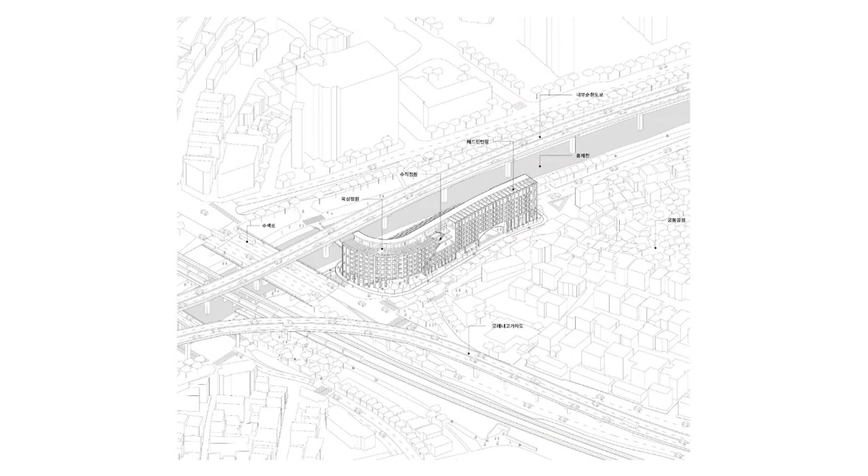Noise. So basically what we did was - the other side happened to be south-facing - we put all the rooms on the south, so you get this sort of almost chicken coop, but in a nice, curvy, 147 meter long linear volume.

Where it faces the ring road is almost like an atrium-like condition, where things are stacked up on top, so that you get the noise but also get the good view. The dashed line you see in the middle is the elevated road.

These are the machines, and on top is actually a vertical garden. This usually has an installed 60% site coverage ratio, but this is special zoning, so we're doing almost more than 80.

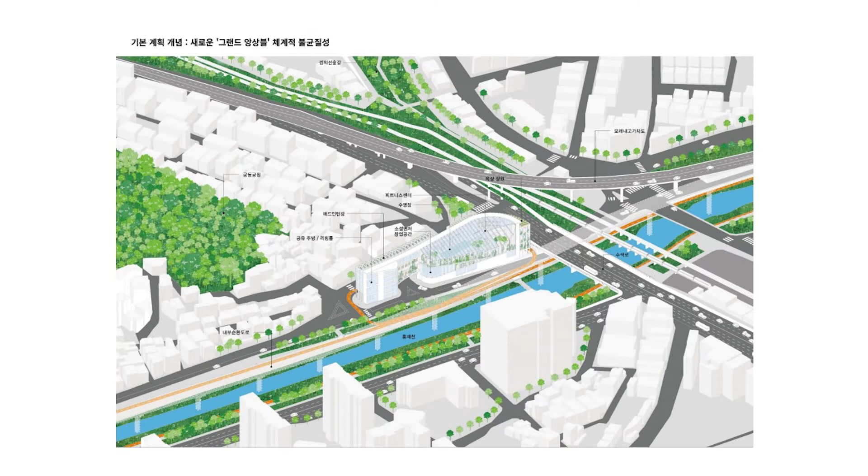So there's hardly any ground left, so everything is built on top. This is a section of the rainwater pump station, which is about almost 30 meters high, vertical for water and so on.

And then we're building gardens and atriums facing it, and also swimming pools and so on. We are working with very good activist type people. Actually, that was part of the brief, that we try to bring this sort of ecology, and actually we were able to suggest that.

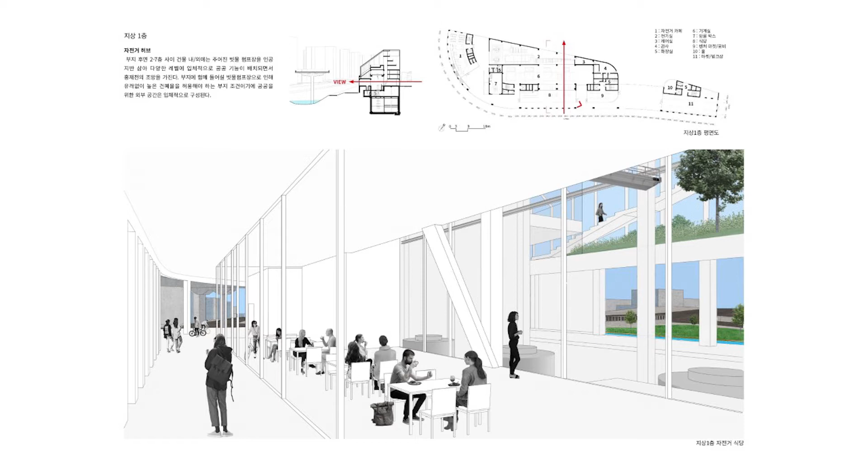So we try to push it as a kind of Silicon Valley of cooking and chefs, because this area has little nice restaurants popping up. So ground level will have the pump. This machine, this industrial site, will be a kind of view-through, so it's part of the identity of this.

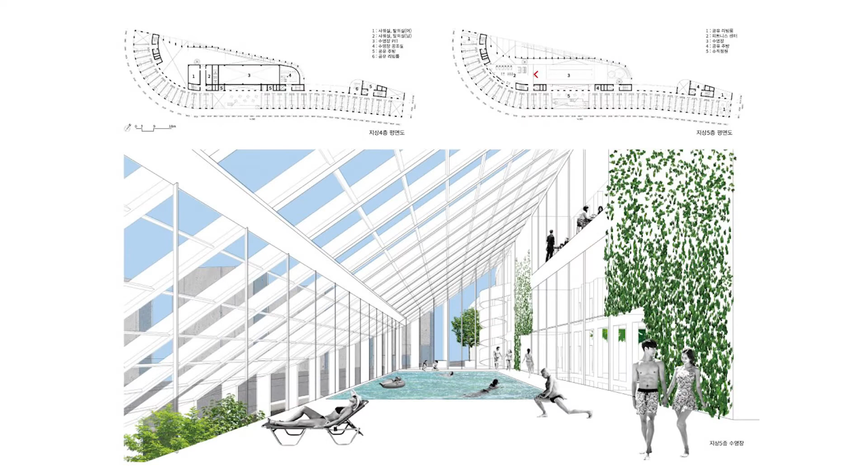And then on top, some gardens, because we have to have that, otherwise there will be no outdoor space. So some of these atriums don't have a wall, just a polycarbonate or glass roof. This will be a quite low budget project.

And the next one is in a similar way - it's the same intention, but also it's a city project. And this is not social ecology, but it has more to do with culture, with filmmaking. You probably heard of Korean cinema, maybe? For the last 20 years it has been really exploding.

But the sad thing happening is that the polarization is very severe. So now, this late 90s explosion of independent cinema, they became super big, famous, like Bong Joon-ho, Park Chan-wook. Parasite, have you seen it? I recommend it, it's playing probably somewhere.

But basically what happens is more and more becomes this kind of Marvel comics, theme park experience that becomes film. And then all these even serious masters are really having a hard time producing film.

So basically these are the advocates from 8 years ago. They were supported by Bong Joon-ho, Park Chan-wook, super famous, who became the indie scene's masters. And the city decided to support this Cinematheque as a city building, which is a very noble intention.

But the then city architect, Seung H-Sang, who just left, abandoned us, but he's part of the show - he was the first city architect. He actually had a good insight that instead of typically having this 3-cinema complex, which usually requires horizontal organization...

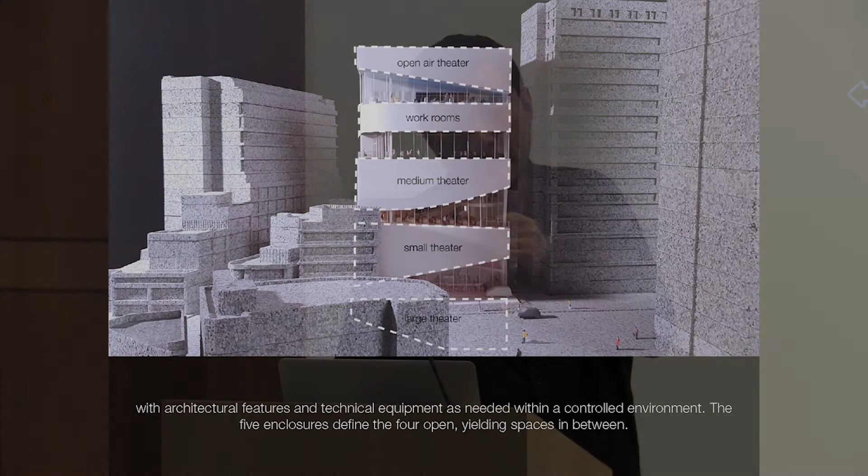So on this site you're able to build 50 meters on top. Basically what we proposed was 5 solid opaque volumes - 3 theaters, and studios, and the other one on top we added as a bonus open air theater - with in-between spaces connecting the 4.

So we call it Montage 425. Film-going, cinema used to be an urban experience. Now it has so much to do with this big shopping mall place with Muji's and Uniqlo's, and it's like this big shopping mall, smelly experience.

But basically what we thought was that the most social element of cinema is this marquee experience - waiting, anticipation, meeting people. That could be a stacked up urban experience. So that's basically how it's going to look.

The ground level is cafe, ticket, and all that, and you can have a nice premiere, red carpet maybe. Above, in between, is the archive and library, and then another open part is the lecture room, and on top will be the office, but more like a community.

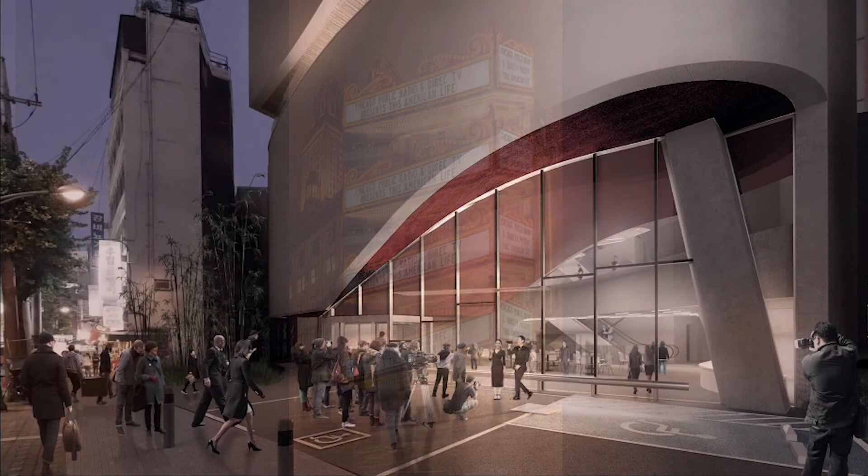So in a way, I think it's an interesting response to this whole urban condition nowadays, that our building is at the center. On the right is actually, this is where we thought our city was going to be - almost like Singapore, a really complete high-rise situation.

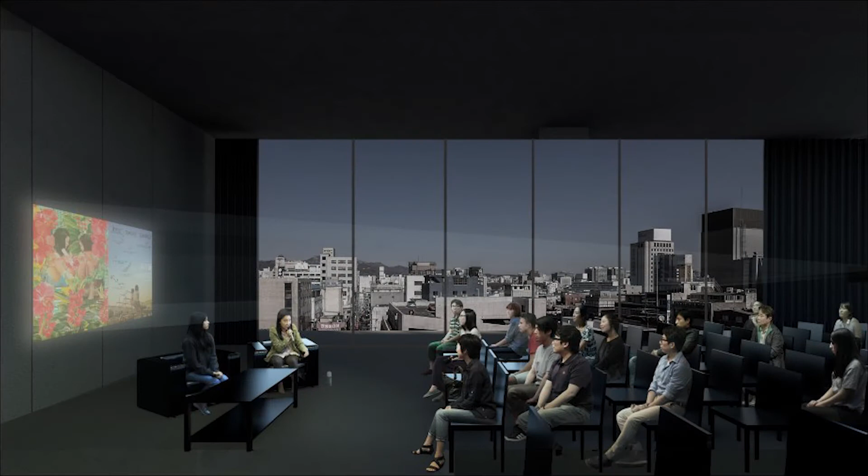But then after a couple of economic crises, we also know that this is going to stay long, and I think we start to accept that it's actually a really good thing. So in a way, our building responds to the tallness and then the smallness of this little old building surrounding it.

From the backside view, this is certain view is going to look like that. Sometimes it looks like one thing, and then sometimes it looks like four separate things, which actually works well also because there are three organizations that are going to be run together, which is one about the classic films.

They're using two cinemas, and then one cinema will be purely for Korean independent film, and the third one is about education and so on. So that's what we've done within the budget, and soon we're going to go through the bidding process.

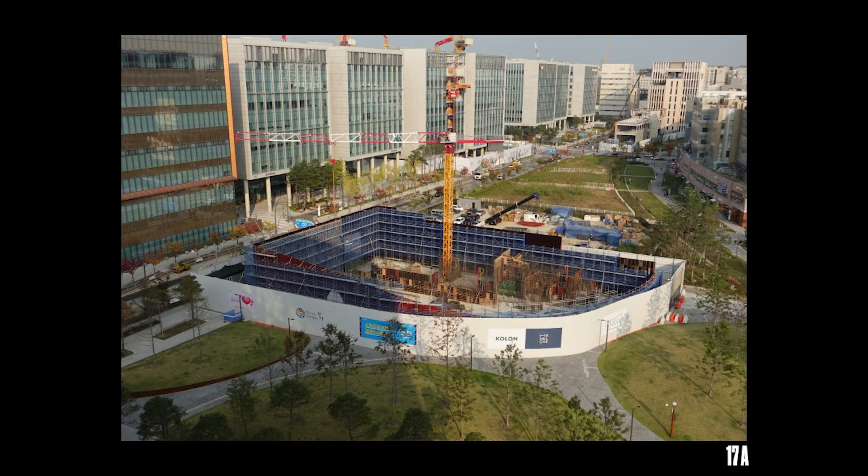This one is also an interesting case about new ground. The site itself is not that unusual, but it's actually a public-private collaboration with a park. It's completely new territory, like a reclaimed area by the domestic airport. This is a very dense, almost office park-like situation with two bands intersecting, about 80 to 90 meters of flat ground. There's a mutual interest between the city and this private company, Kolon, who had a small art foundation supporting community arts, not superstar arts. They contributed this small gallery and will donate it after 30 years of use.

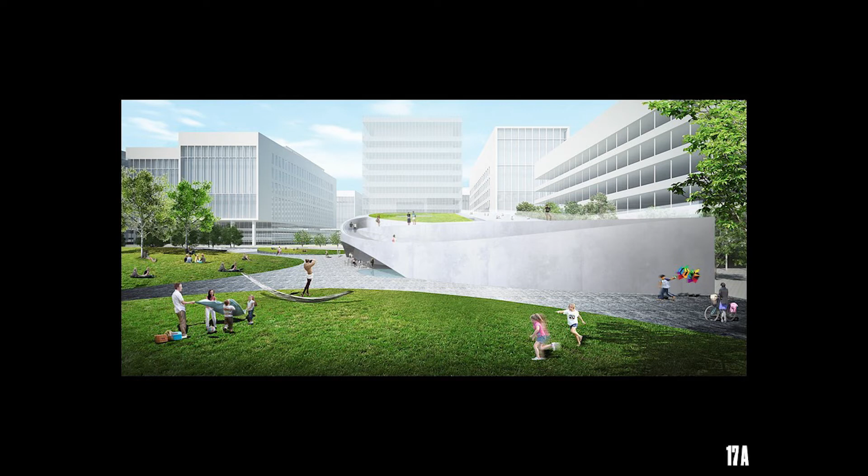So basically these are the more or less recent situation. The basic idea was that since everything is so rectilinear, we proposed some shortcuts, because that's how people tend to walk through. So it creates 4 mounds. Three of them work because Seoul is quite 3D, not flat, but this feels almost like Holland because it's reclaimed. The fourth one also works like a mound, so people can climb up.

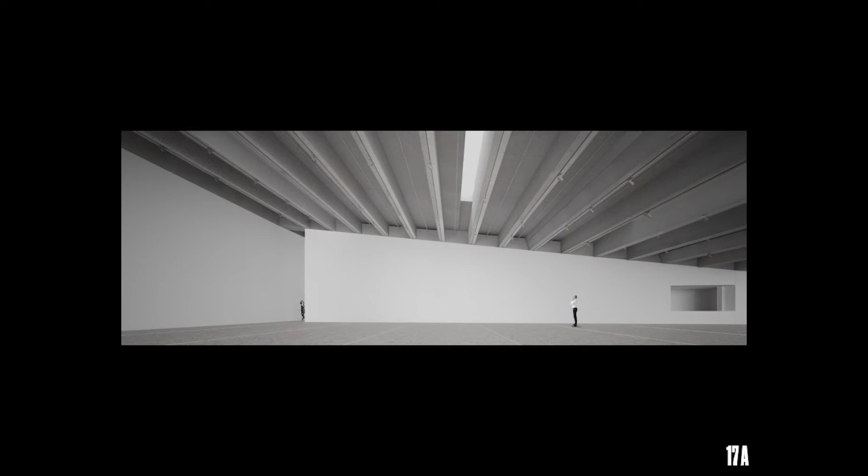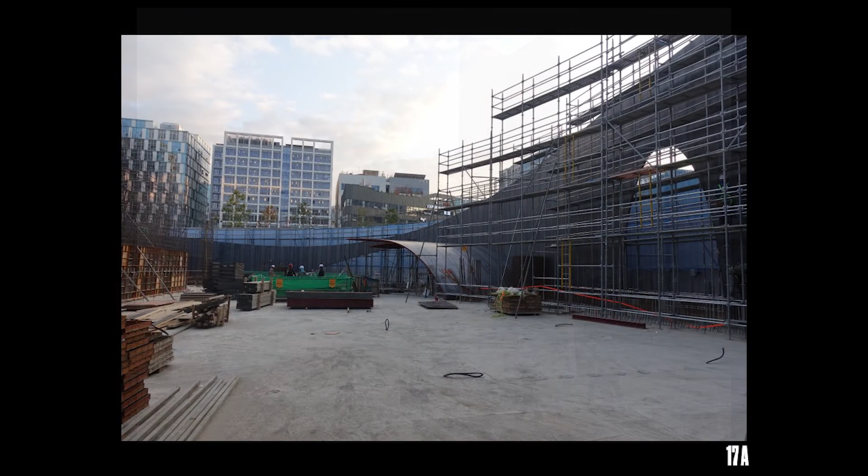This part is already finished. It's funny that this building comes later. It's going to be a sort of rounded corner. In the middle, there's a cozy little valley, almost 27 meters, a very shallow arch that works as a gate but also like a cloud bridge, so people can climb up and occupy the fourth mound as public space. One of the briefs was that we should provide various heights, so the lower part is quite intimate at 3.3 meters, rising up to 11 meters, giving a drastic surprise once you walk in.

And actually, concrete-wise, this is an 11 meter concrete mock-up. We're going to pour it all at once so you don't have a cold joint every 3 meters, but it's pretty crazy. This is a picture from last week, actually. It's going to be something like that.

Okay, next, do I have time? Yeah, okay, so this one you've probably seen.

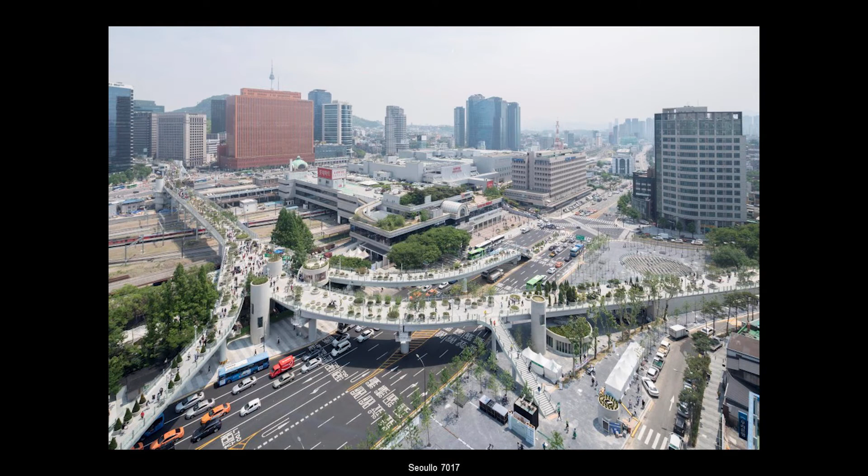This is an MVRDV project for Seoullo. This was a very noble intention which I very enthusiastically support, because Seoul is not like a Highline. The Highline is sometimes read as a bad copy, but the Highline is basically putting a cherry on top of an already amazing city, New York, which is already pedestrian friendly, adding vessels and other things. But Seoul is a very challenging place for pedestrians. I personally never had a car, I'm a walker and sometimes bicycle. This was a 1 kilometer long space that is really challenging, but it also has historic significance.

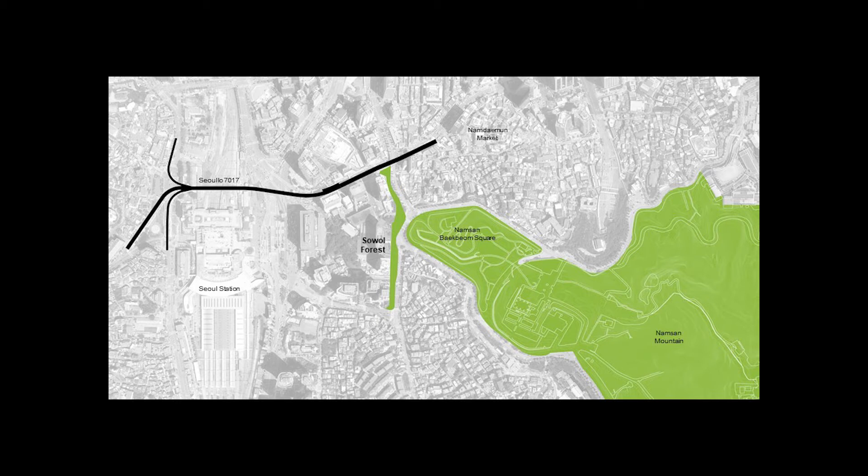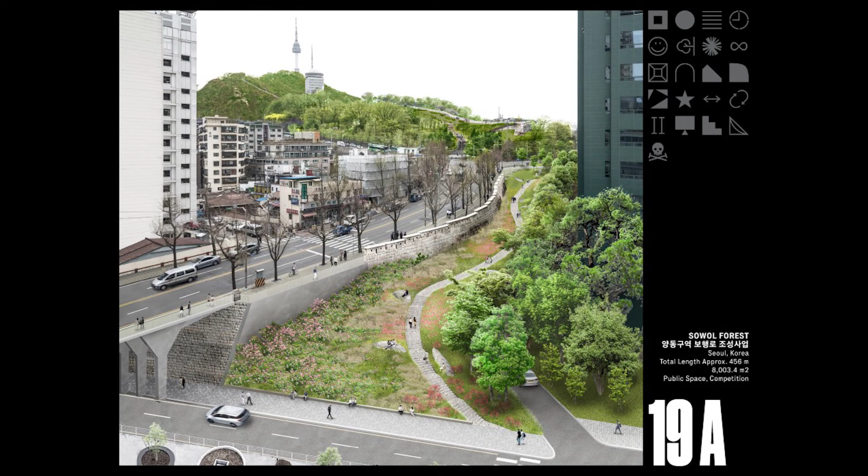This was also a city architects' initiative, and MVRDV won with their idea of an encyclopedia of trees, from A to Z, maybe around 500 of them, very educational. We were invited and came in third. This was our failed scheme, which was completely opposite, I think—instead of one very snappy thing, we did 8 different conditions, very complex, each one so specific. We also expanded our boundary because we realized this 1 kilometer long existing infrastructure regeneration almost touches a much bigger thing, the Namsan Mountain with its 600 year old fortress. So we didn't win.

But somehow 6 years later, earlier this year, they invited us back—I think because they got the idea from us, though I don't know, you'd have to ask the other city architect. But as a consolation prize, this is another stretch about 456 meters long, with a center about 27 meters up on top, that touches the Namsan mountain.

So basically what we did was very simple. Our running scheme has this kind of chopped-up forest situation, but we're not doing anything architecturally—we're reconstructing the mountain and making the cars and the city disappear as much as possible, so that Namsan mountain has a presence that literally spills down to the valley. The cars will be leveled differently so they go underground. You can see the history here, 600 years, different techniques at different times, and the challenge of totally unnecessary cars here.

But this will be like this. And even this part, they didn't know what to do with it because it's chopped up by the road. But then we're just going to reveal it, and we're going to work with the archaeologists and so on.

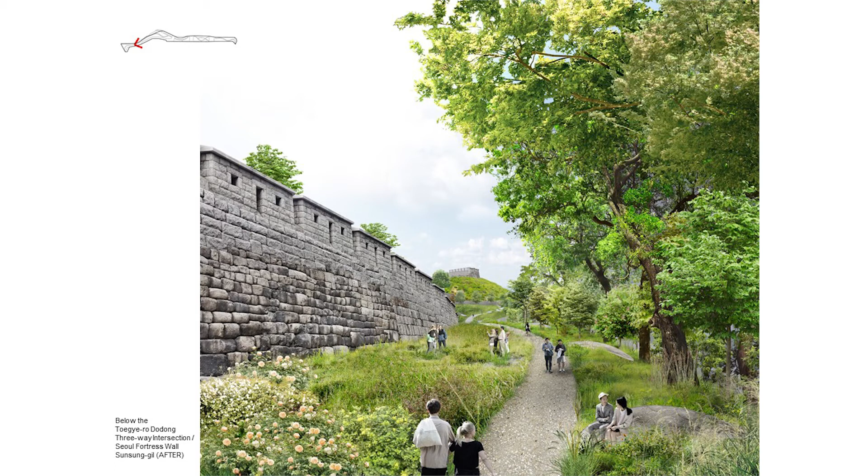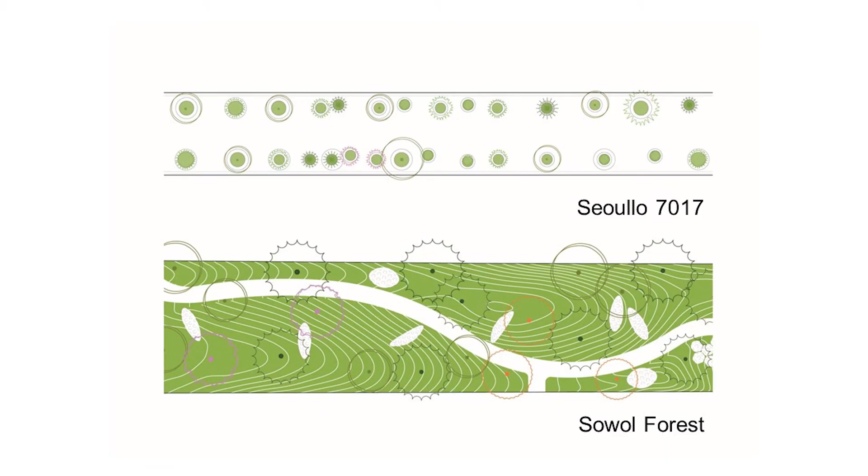So the idea is, since we have this fabulous encyclopedia of trees, we're going to keep Namsan beautiful and exuberant, maybe less conceptual, just spilling down. We're happy to have one less element in the city at certain parts. This is the Seoullo area, and although we're half as long, it's going to have a lot more soil and so on.

Last pair of projects deals with the water, the Han River. Today I walked around in the rain, this melancholic beauty and grandeur of crossing the river and so on. I was very jealous, because the Han River is about three times wider, one kilometer wide, with 30 bridges now.

And of course, it used to be different. A hundred years ago, our city was about 200,000 people, a century ago. This is a depiction by a Korean master, Gyeomjae Jeong Seon, known for realistic depiction. This is the Dongjak area.

I am old enough to remember when we were able to swim in the Han River. Of course, it came with flooding every monsoon season, and then it quickly became that. All the riverbanks became this vast, unaddressed area, and these are the flood zones, and this happens every year. This is another fun video, but maybe if I have time, I'll show you after.

One interesting thing about controlling the flood on the Han River is that basically the whole thing came from this engineered product that has no orchestra, no conductor. It's like a big orchestra without the conductor—flood control and the need for cars, and also creating land to develop apartments, mostly the private ones.

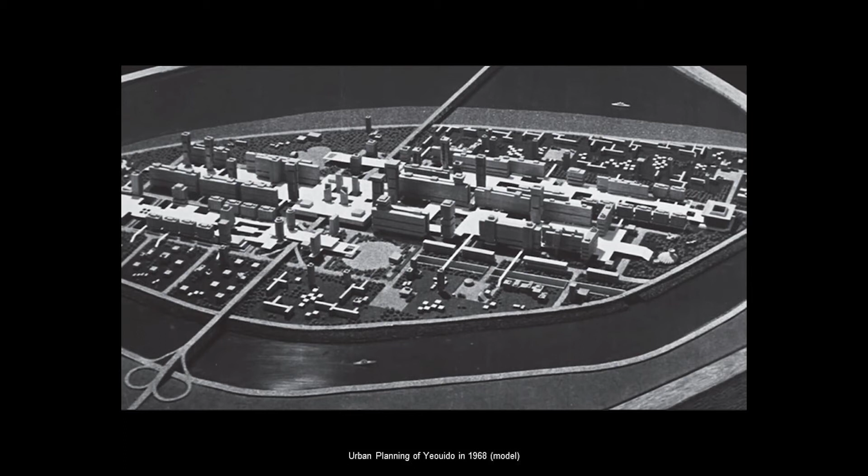But then this was completely exploded, because they needed rubble to create this modernist, almost Potemkin city, which is Yeouido next to it. This happened under the military dictatorship, under the president, and then it exploded.

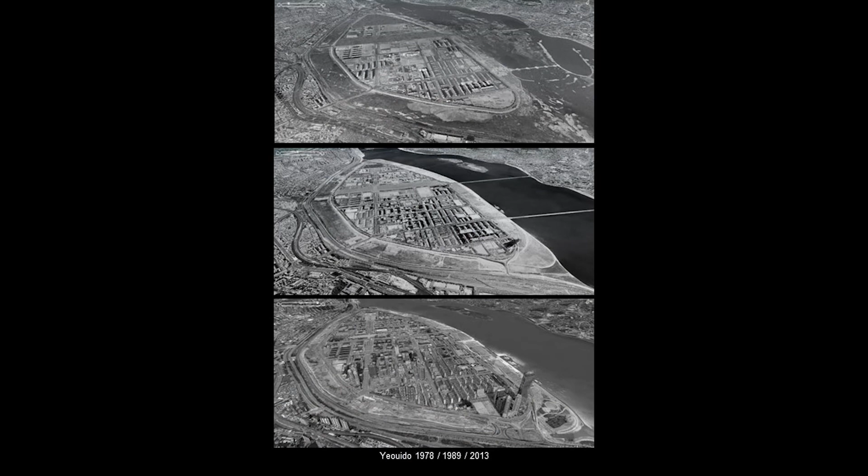But strangely, this Bamseom Island grew back because of the sedimentation process, actually six times larger than what it was before, and it's still growing. So then it became one of the most important bird migration sites, one and only in an urban setting—it's called a Ramsar site. It became quite an interesting symbol for nature's healing power and resurrection.

But I think that's a little dubious too, because in a way, for me, it's almost like a mutant—because the sedimentation happened while they built dams on both sides, so it's completely controlled and became like a lake. The water speed got slow, so it started adding sediment. It's kind of an unintended collaboration between humans and nature.

I think it's a good reminder for us to think about now—the implication is that it's not just nature anymore, but this kind of non-human agent around us, whether it's AI or just physics or this whole system. Anyway, the brief was for two bird-watching programs.

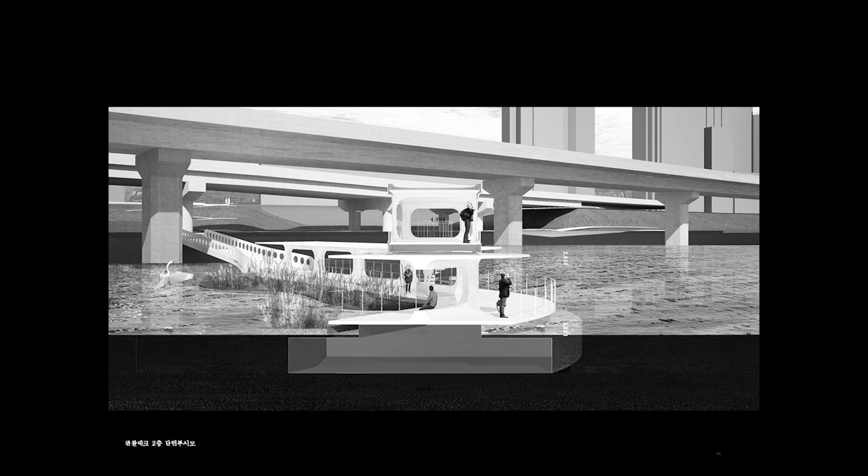So it's a floating deck that we suggested with as minimal a presence as possible. It's the first time we're doing this kind of pontoon structure that goes 9 meters up and down. So that's going to look like that.

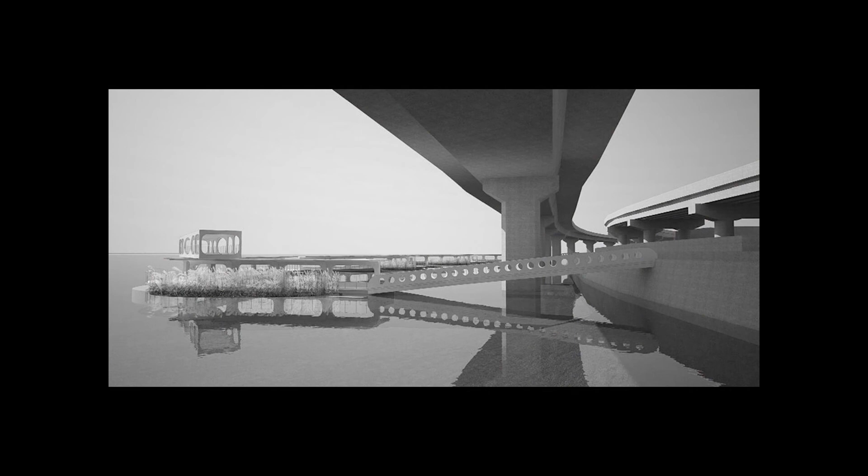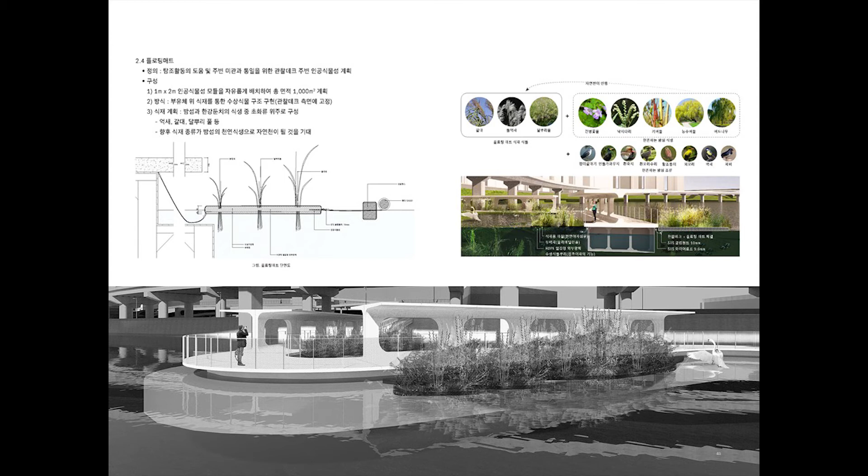Initially they wanted something very showy—other competitors were doing almost a mini Bilbao thing. But our idea was based on how bird watchers actually are: they have this kind of super nerdy job, spending hours looking through binoculars behind the reeds and so on.

So the idea is also—we're not allowed to go to this island, but maybe some birds will fly in, because we're trying to work with botanists so that some of the seeds will flow through it, so it will kind of duplicate in a way.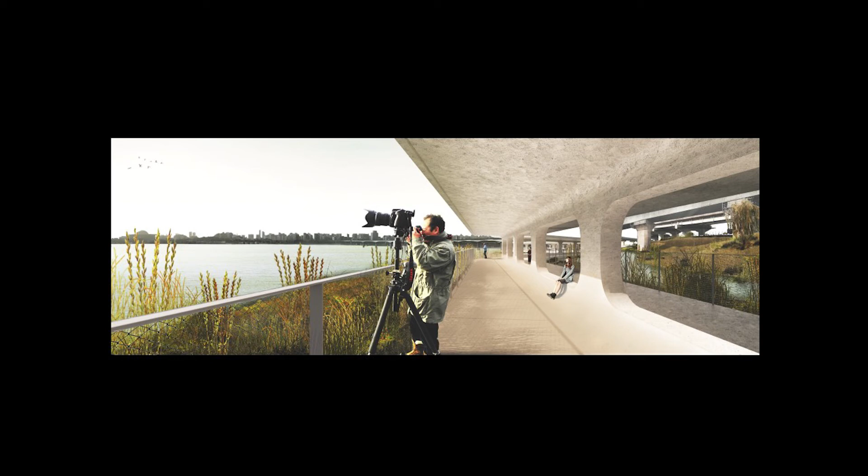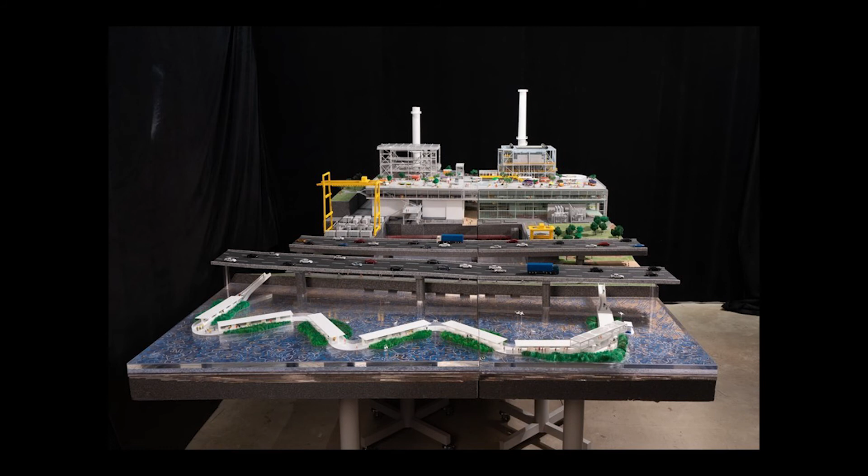And then what happened was, this was a kind of waiting stage—long story short, but last year, exactly a year ago, another open competition was announced, using this sort of finished power plant that was built in the early 70s. This was the first power plant location—this is the first one you're looking at.

And now Seoul has such a shame situation, unlike Budapest, that you get this vast amount of space, walled by first private views, apartments, completely walled, and then another layer of wall, which is a high-speed road. It's the most idiotic thing, but of course it's understandable—we had to grow so fast.

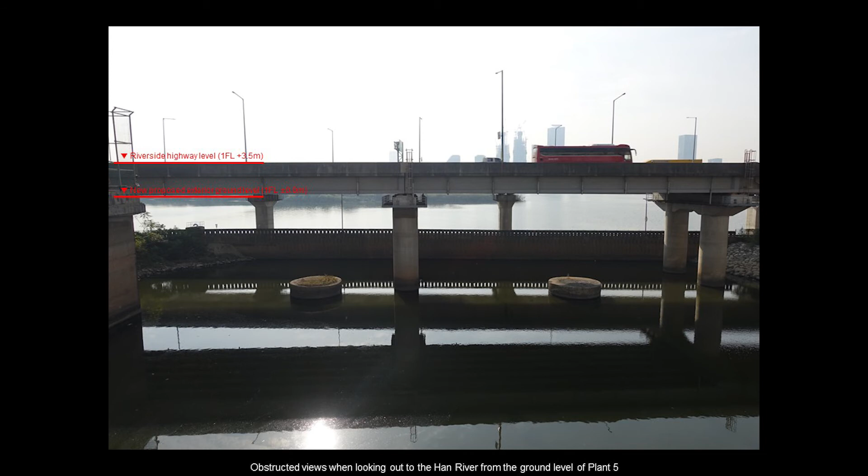So basically, we thought this would be the last chance to have a view of the Han River. But when I went to see the site, I was completely depressed almost, because at ground level you see the Bamseom Island blocked by this 4-meter tall flyover. Then when they gave a site tour and I went up there, I realized this is going to be our idea.

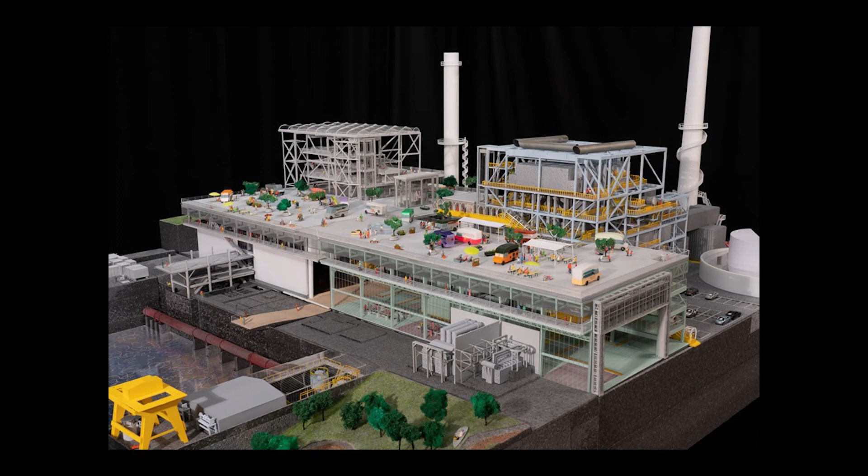I was really happy that it confirmed this first has to work with the urban space, because how many times does this hipster factory thing turn into coffee shops meeting something—so many of those. But the idea is basically you get this 18-meter high roof of the 2 turbine hall, and the idea is to be as urban as possible.

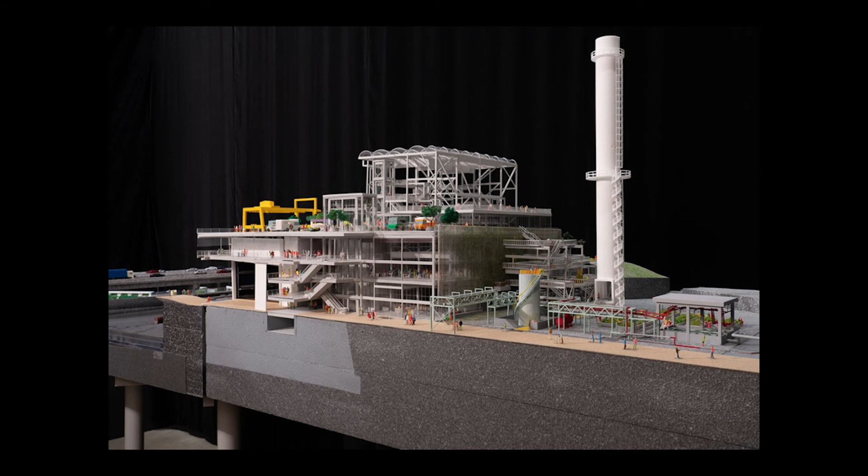So you're going to bring up a big elevator for 6-ton vehicles so that food trucks can come in. No Starbucks, no big franchise, and people don't have to pay, so you get this sort of Pompidou thing in between the boiler and the turbine, but you go directly above. We are reappropriating existing structures to make people climb up as frequently and all around as possible.

Some of this has been very challenging, because this is a 1968 American engineer's drawing of this part—basically a power station, 50 meters tall, really a kind of sublime machine.

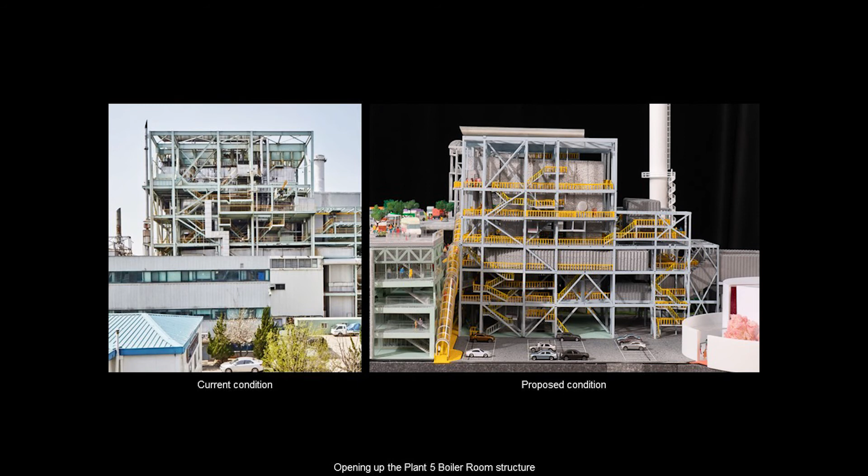Our work has actually been looking around, checking all the drawings, 3D scanning everything. Still, we have to go back and really check the discrepancies and identify what's to be taken down and what's to be salvaged.

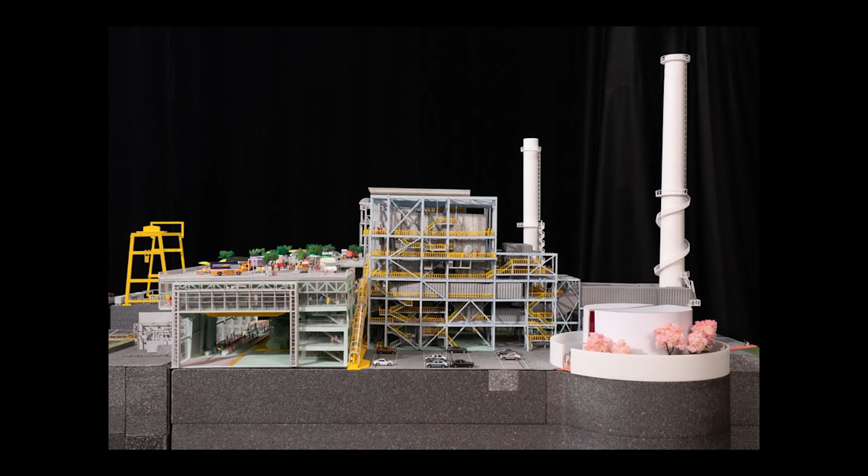So basically these are the ideas, some of the effort. The other part will be gutted out, the machine will be gutted out, and the space will be used as a black box theater for 600 people. This 50-meter tall space will be art space, some residency.

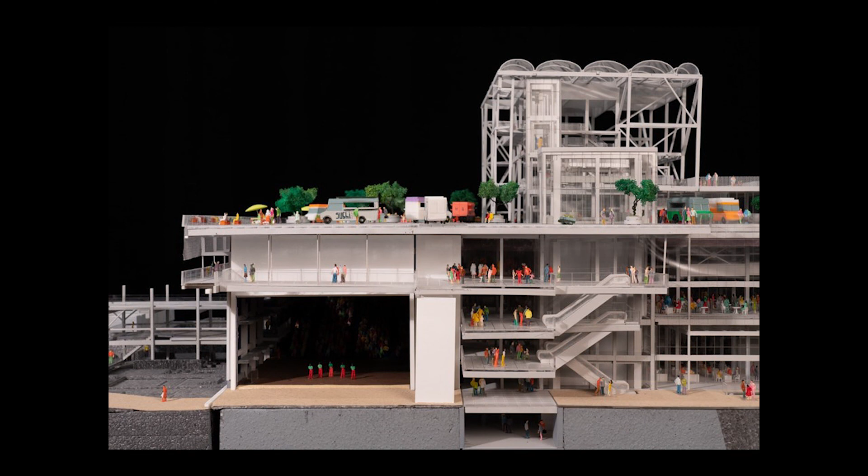On top we suggest just putting a roof, so it becomes like a gigantic pavilion on top, because it has a really beautiful view. So that's some of that.

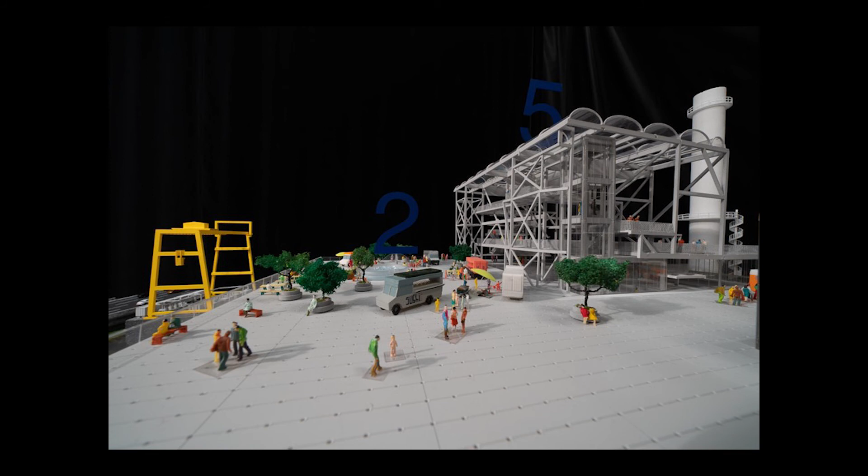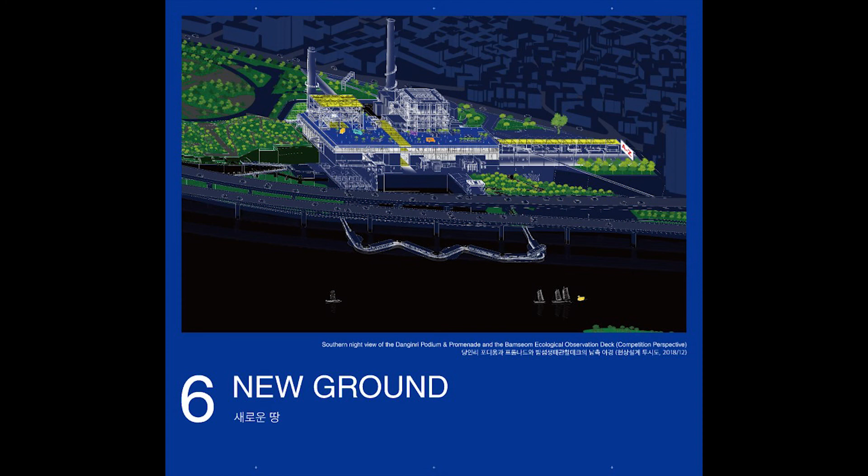And then there's another part we want together with it, which is the underground parking garage. What we did was propose a new ground so that these 2 turbine halls can be connected with a vertical lift door, like an aircraft hangar, turning it into a 130-meter long space. The parking garage above will also be another public ground adding another 120 meters.

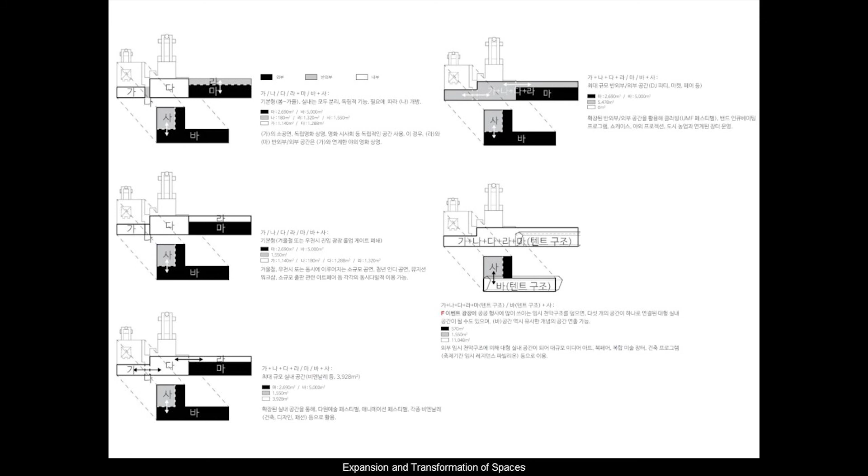We sort of convinced people how this can actually be bigger than the Tate Turbine Hall or the Arsenale of Venice, almost the same lengths. I think this pretty much shows this 250-meter long span that could be appropriated in many ways.

As Ugyusung mentioned, we don't know who's going to run it, but I think it's pretty promising.

It's also quite challenging because this space is not meant to be public ground, but we have to go under this elevated road for this floating structure that fluctuates 9 meters, and we have to go up to almost a three-dimensional imagined ground—it's like our substitute tabula rasa in a way.

A lot of people mentioned, and I hadn't realized it, but they said, is this your fun palace? We didn't design it as that, but it kind of looked like it, right?

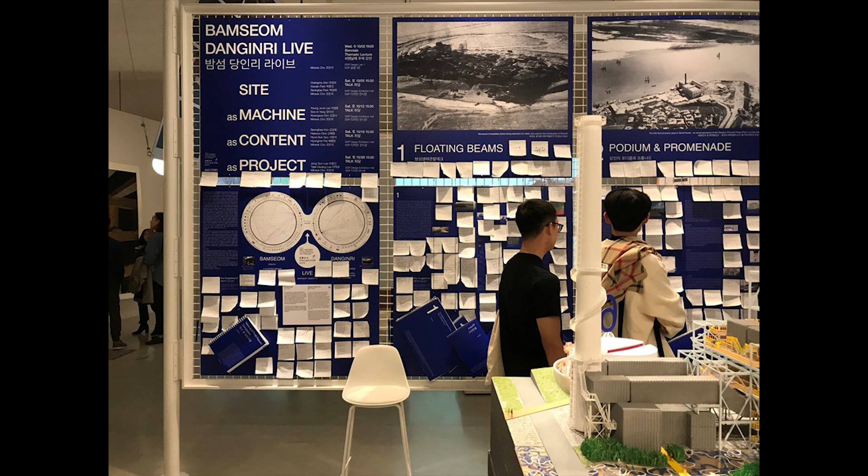And then we had a biennale on urbanism and architecture. We gathered around the theme of collective city, and we actually literally brought people's posted comments. We had an ongoing series of talks, and Hyungmin, you were showing up here too.

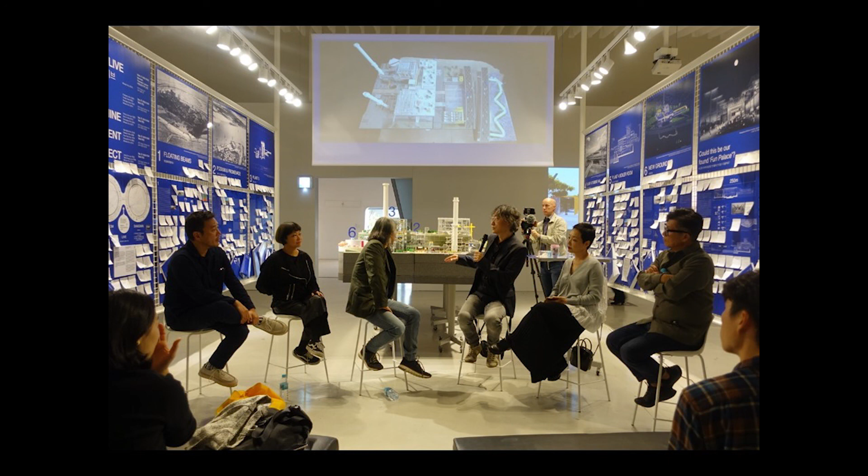So basically this was a diagram. This is Bamseom, which started 3 years ago. This is Danginri, 2 years ago. These are all the entities—public, private, consultative roles, and so on.

And these are the communications, and we happen to be—not that this is reductively idealized, it's never really a round table. We are the hired ones, but somehow we're in the common element, and we try to do some conducting.

I think that's the last image, and there's a video, but I think I went over my time. So, okay, thank you for your attention. Thank you.